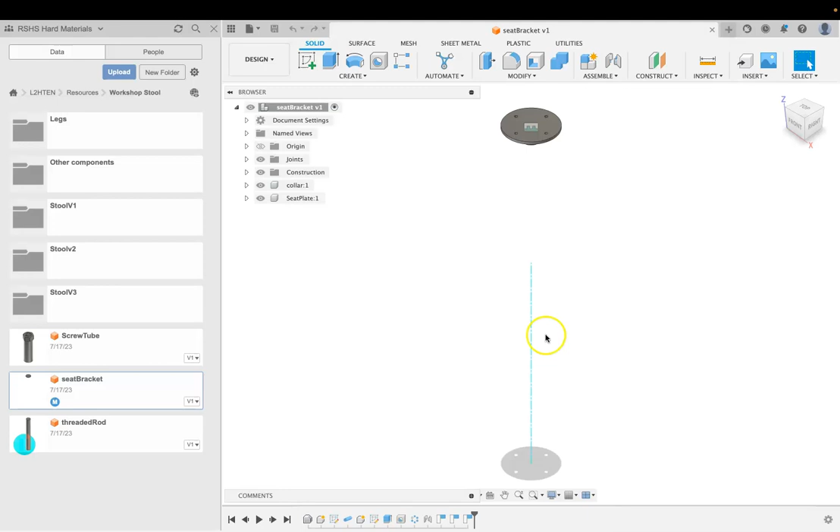We're going to be going about how to set up and prepare a file for our CNC plasma in order to cut out our seat plate. Our seat plate is all we need. So what I'm going to do is turn off the collar with the eye, turn off the construction, get rid of that line up there, and then home it so we can see.

So at the moment we're in our design workspace. We're going to be moving to our manufacture workspace. Now the first thing that I want to overview is what we want to happen after manufacture. What we start with is a square piece of steel, and we need to cut this round out of it. We're not going to be cutting these circles.

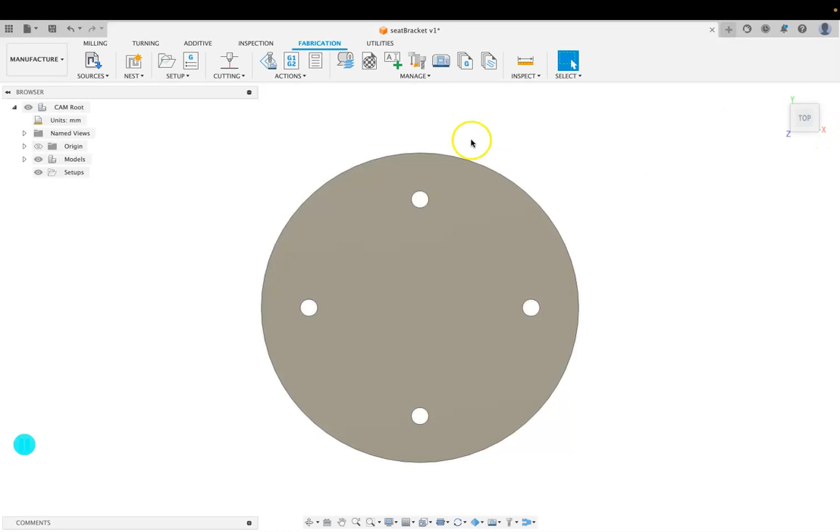Cutting small circles on the plasma cutter doesn't give a great finish, so we're going to be drilling those using a pedestal drill, and we're going to do that manually. So all we're doing is setting up to cut out this circle. What we have to do first is look up here. We've got different tabs, and the tab that we're concerned with for the plasma cutter is this fabrication tab here.

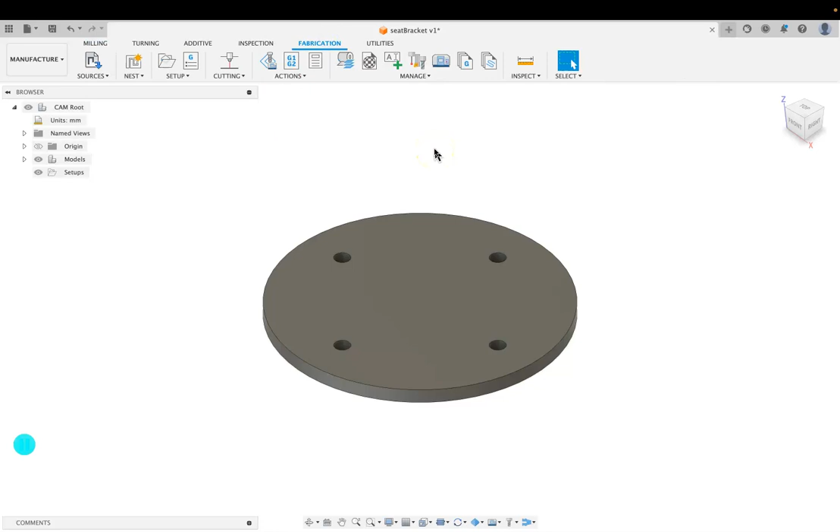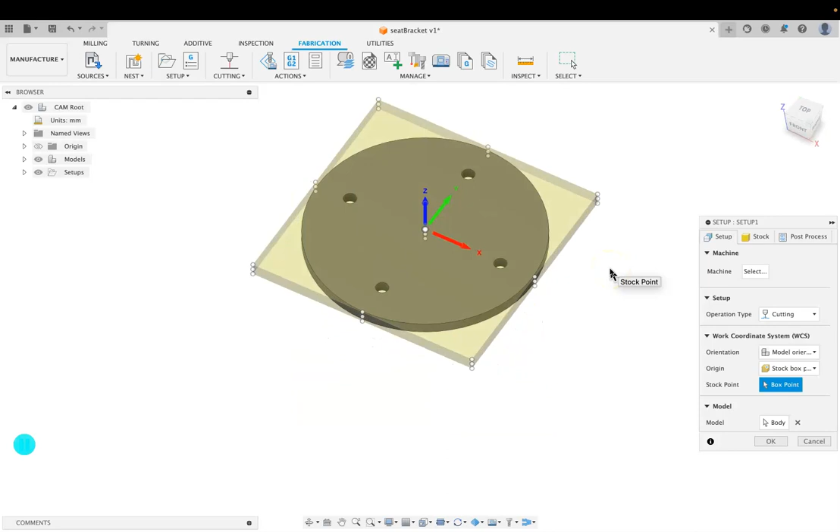The first thing that we need to do is set up what we're going to be doing. This little light color here is representative of the square piece of steel that we're going to be cutting the circular plate out of. You can see in the middle there's our X, Y, and Z axes, and they correspond to our view cube in here.

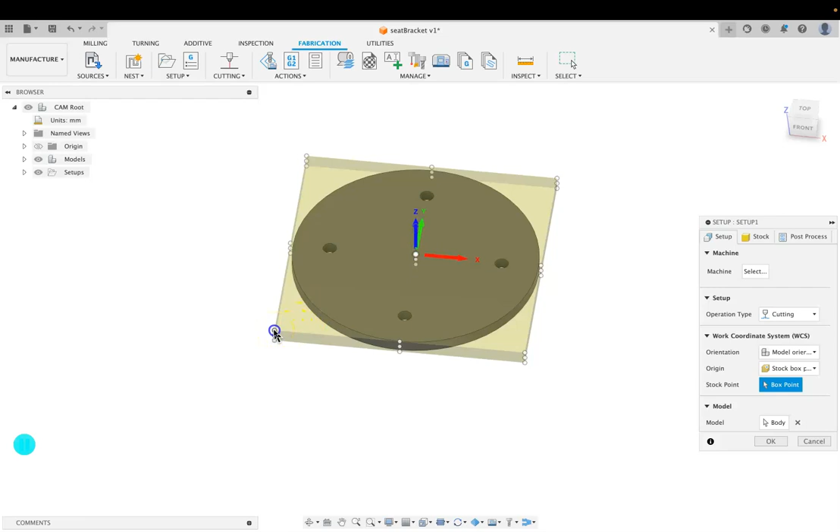Typically when we are doing a setup, we want to make sure that our zero is in this bottom left hand corner and on the top. This defines our starting point, and this is important for when we're actually on the CNC plasma. The stock is this material out here, this square. This tab up here is where we access this.

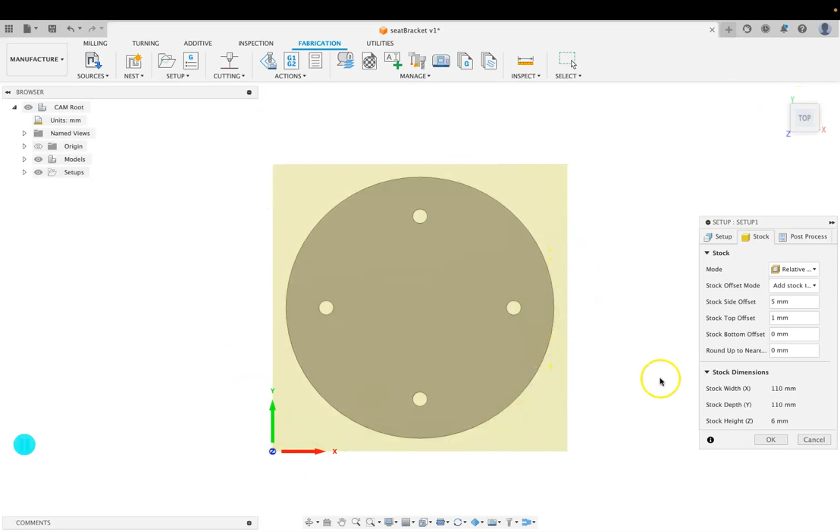Now the side offset defines how much extra material from our circle that we have. For example, if I put 5 mil, you can see that it has grown 5 mil on all sides. Top offset is the same, but it adds material on the top. For us, we want it to be 0 because we've already set the material that we need. And then we go OK. So this here is our setup finished.

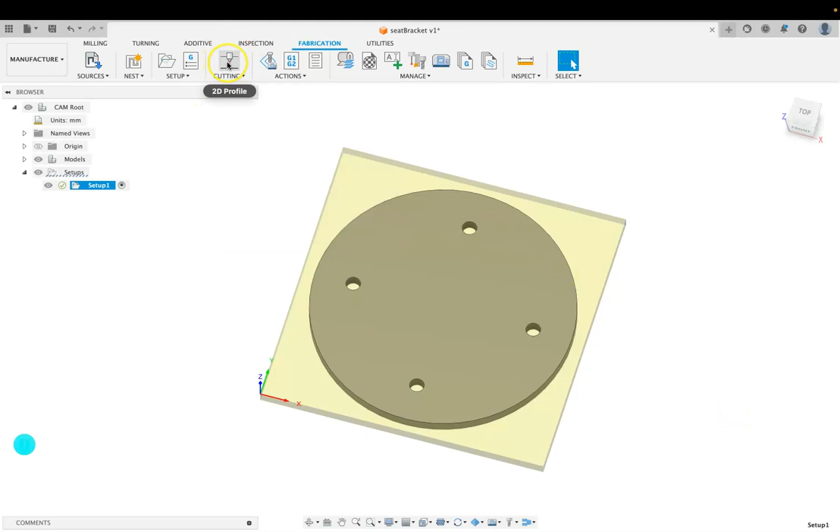Now what we need to do is define where we want to cut. We do that by going up to this tool over here, called a 2D profile. A plasma cutter only cuts in 2 dimensions. First, in this window, we want to select our tool. We've got our tool menu up, and in our cloud option we want to select the plasma cutter, and these are some preset tools with settings already attached to them.

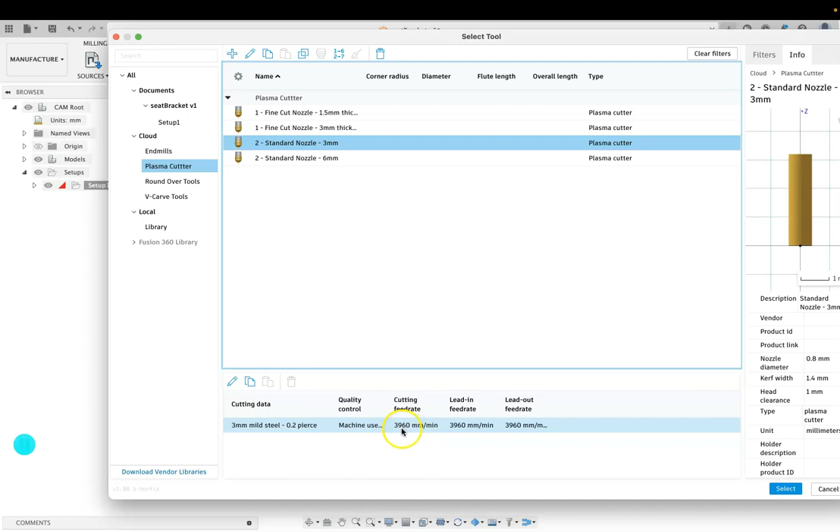In here we're going to be using 3mm steel. So we select the standard nozzle 3mm, and you can see here we've got our speed settings. It's our feed rate, and we've got our pierce time. This is how long the plasma cutter turns on to pierce through 3 mils worth of steel. It's 0.2 seconds, and it's important that we remember that for later. Once we've selected that, we go select.

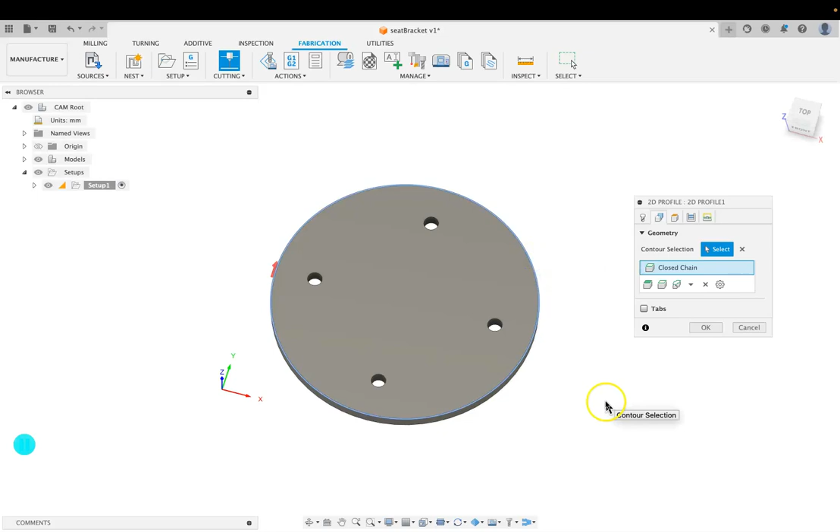Then we just move through these tabs. The geometry tab defines the contour that we're cutting, so we just select that top edge. If we have a look, you will see this red arrow here, which states that it's going to be traveling in this direction on the outside of this line. If I select that red arrow, you can see it's changed to the inside of the line, and we don't want that; we want it to cut on the outside of the line. So on the left hand side of the line and going in this direction is the correct way.

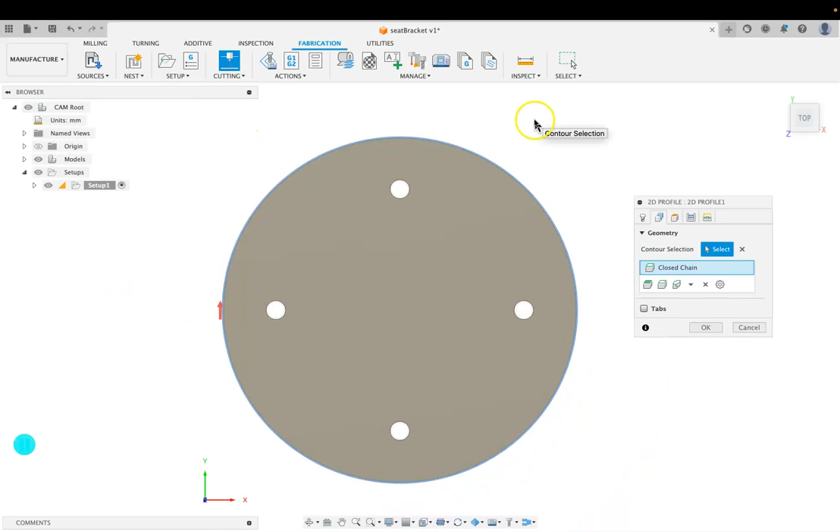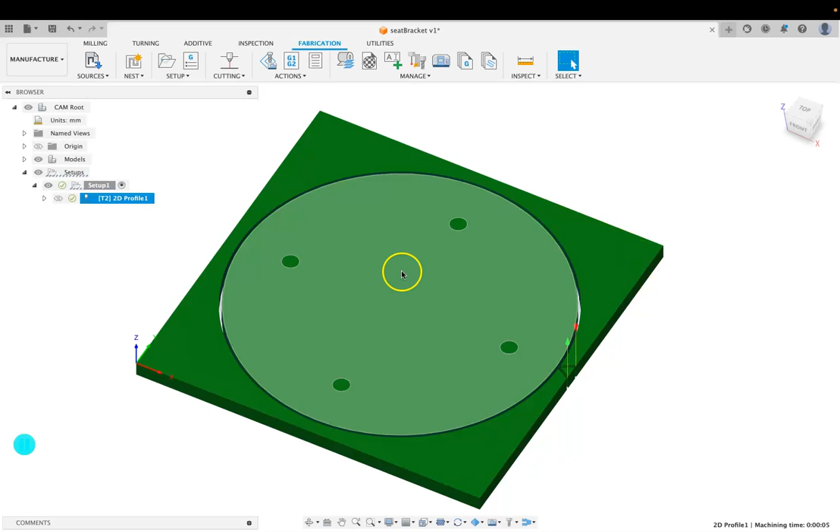We don't need to worry about heights, so we're going to skip that tab, but we want to look at passes. Before we do that, I'm just going to go OK so we can have a look at what that looks like. This green area here, that's our stock. This circular bit is the plate that we're cutting out.

This line here is where the plasma cutter starts. It comes in and around, and then it comes out here. It does that because it needs to blow through this material, and if it's any closer it may affect our part. So we want the plasma cutter to blow through the material away from our part so it doesn't get damaged.

So that's our starting point. Once we've done that and we want to make more changes, we go over here, put our mouse over the little icon, double click it, and then go to passes.

What we want to focus on here is our finishing overlap. What a finishing overlap does is it designates how far our plasma cutter cuts past where we first started.

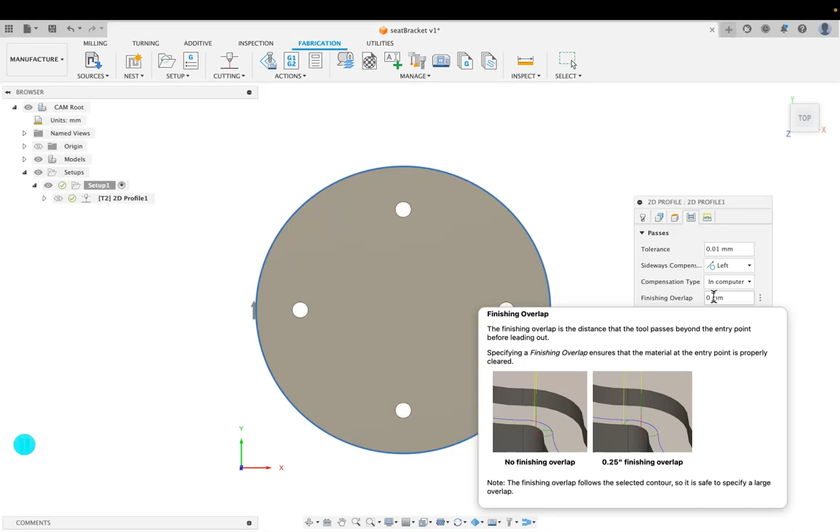For example, I'm going to put in 3 mil here and press OK. We can see here that this is our finishing point. When we looked at it earlier, it finished here, so it's actually traveling past where we started 3 mil and then exiting. The reason we do that is so we get a nice finish in this join, because otherwise we might get a little out bit in here, which would then have to be ground off.

So go back into our settings again. We've got our 3 mil. We don't want to leave any stock.

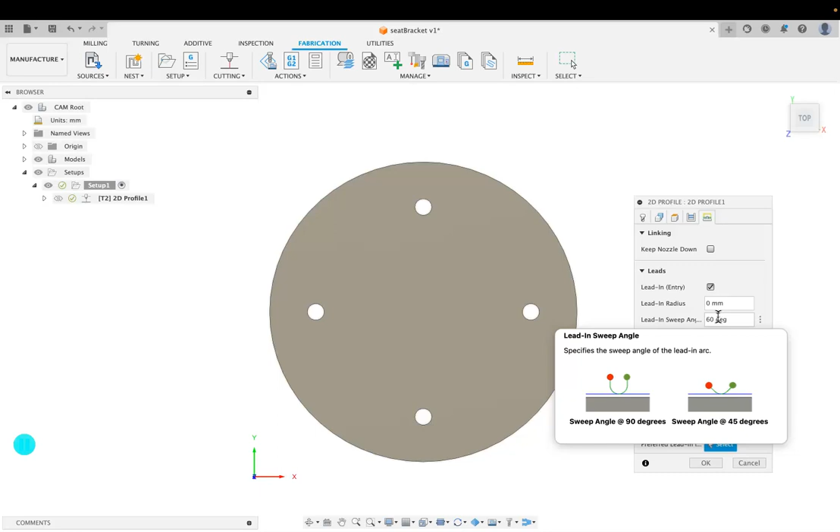This here is our lead in and lead out. If we hover over that, it designates the angle in which we approach our part. When we press OK, this angle here is our 60-degree lead in. It's a nice lead in, and you don't have too much of a rough edge to the approach of the edge of the part. It comes around and then it leaves as well on a 60-degree angle.

So we're going to keep those settings. There are certain circumstances where you might want to change it.

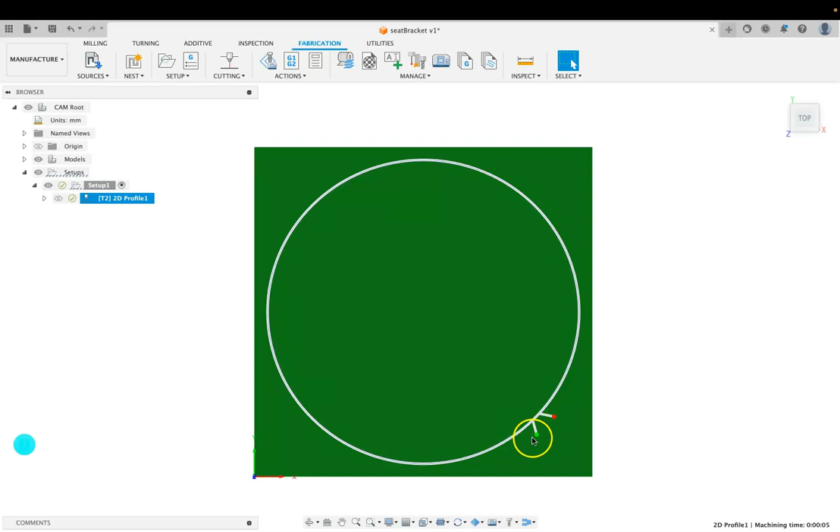Piercing clearance, we need 1.4. And this here, the preferred lead-in - what I'm going to do is select a corner and go OK, and that changes the position of where we're at. I do that because there's more material in there, and if we're dealing with this rectangle, it means there's more place to pierce. So there might be certain situations where you want to place your piercing point or your start point.

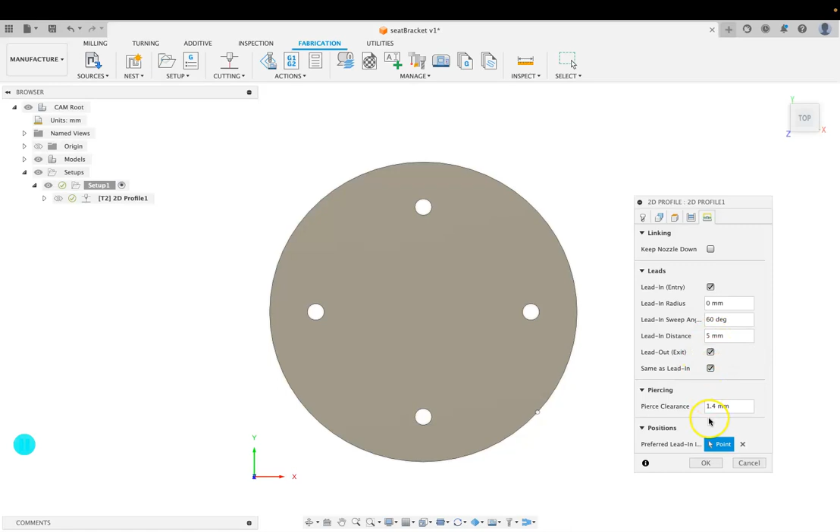And there we are, good to go. Go OK. Right.

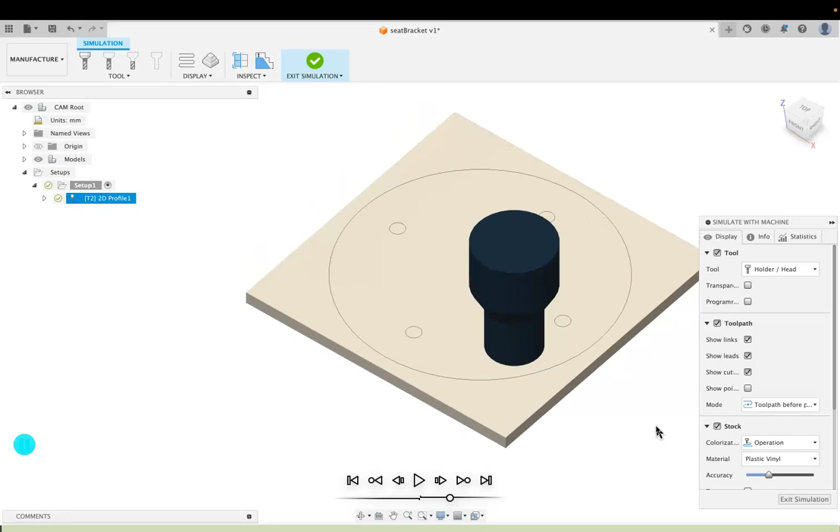So what we want to do from here is simulate, and a simulation allows us to pick up any errors that we might not have determined in setting up the toolpath. So what we can do is press play, and it will show us how the machine is cutting.

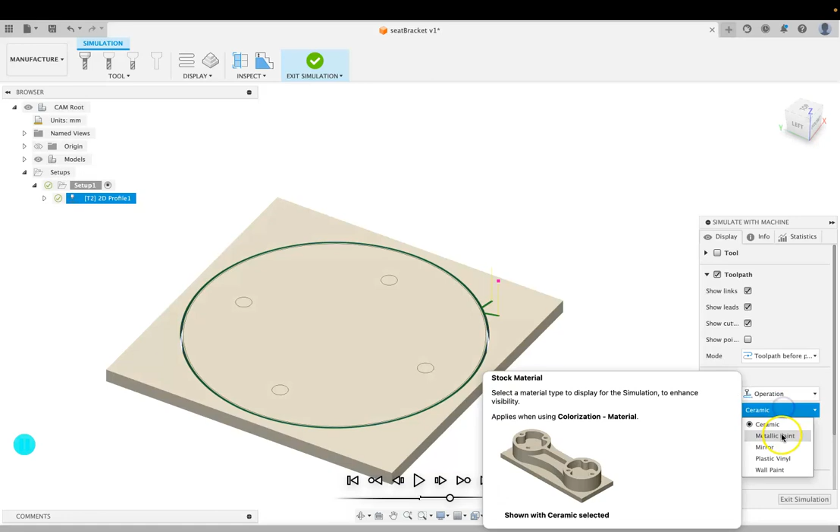And I can turn the tool off so you can have a look. See, it goes past 3 mil and then out. You can turn your stock on and play with your different types of materials, and it will give you different looks.

Once you're happy with the simulation and it's cutting out the material that you need, what we need to do is post-process it. So we go up to this tool here next to the simulation, and it says post-process. We want to click on that.

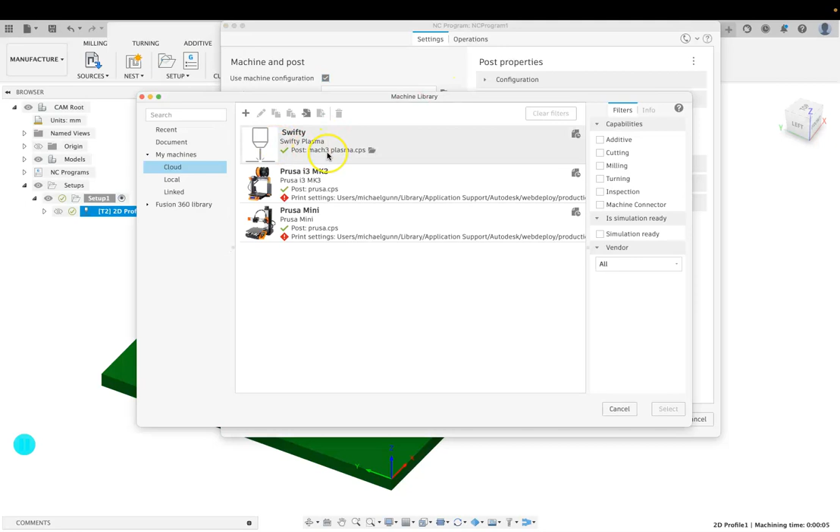In here, we want to use our machine configuration. We want to click on the Swifty Plasma, select, and then it will bring up our post processor.

If you're not using machine configuration, what you need to do is choose from library, and in search, look for Mach3 and then the Plasma, and select that.

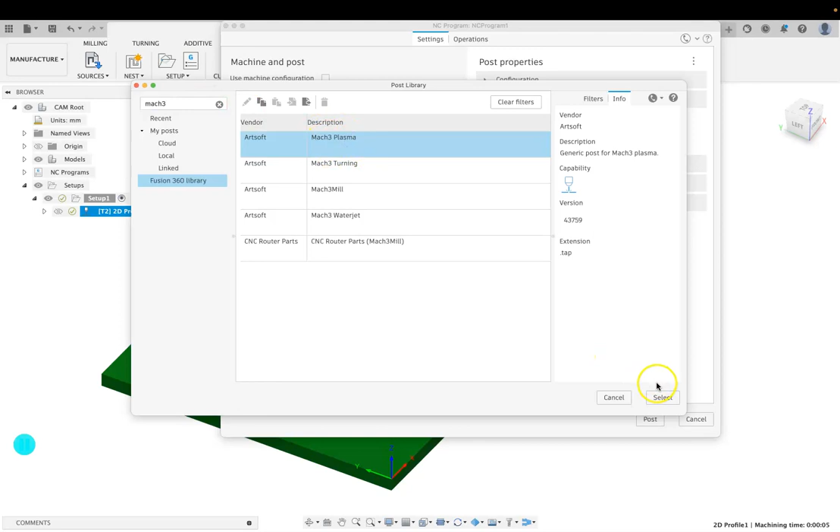And then what we need to do is give it a file name. So 1001 is great - it allows you to be able to define 1, 2, 3, 4, depending if you have multiple files. Comment, and then I'm just going to put Mike G for my name.

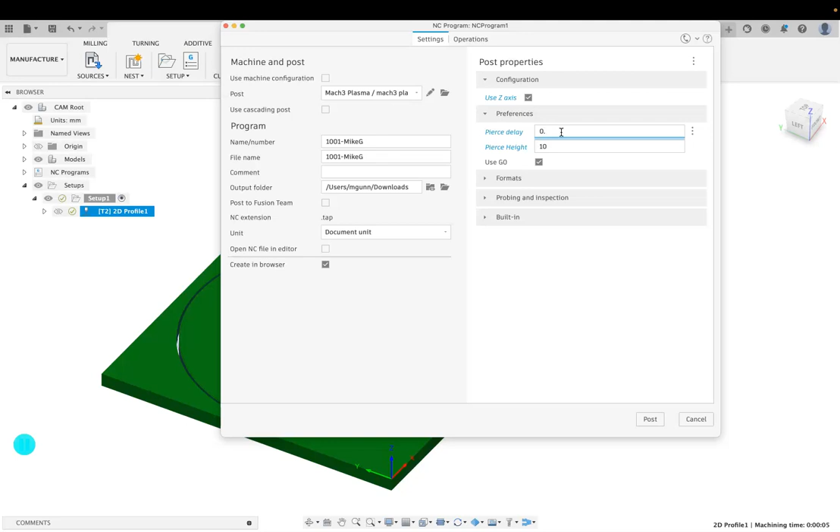Over on the right hand side, under configuration, you want to use the Z-axis. Now pierce delay is 0.2, and that was defined in the name of our tool. I'll just show you where it is - if we go into the tool, we go into plasma cutter, 3mm, 0.2 pierce.

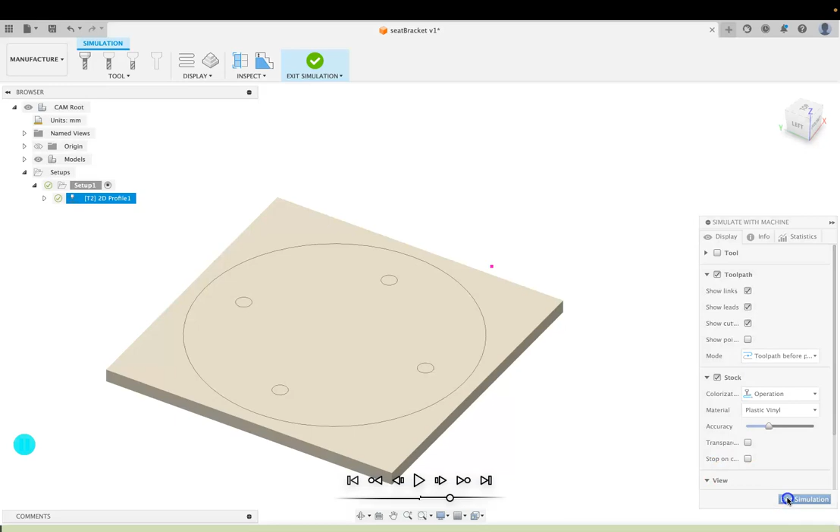So now I just have to go back to doing this - Mike G, 0.2, make sure the Z-axis is selected, pierce height we're going to use 10, built-in we want to make that 1000, and then we need to choose an output folder, and I'm going to choose the desktop.

We need to check our operations, make sure the 2D profile is selected. Sometimes if we have more, we might need to select more, but in this case it's just the one.

So we've selected our post, we've named it correctly, 1001 with your name on it. We've used the Z-axis, pierce height at 10, 0.2 pierce delay for this material, which is 3mm, but if you're using a different material, then it would be a different delay. You've chosen your output folder, and you have also changed your high feed rate.

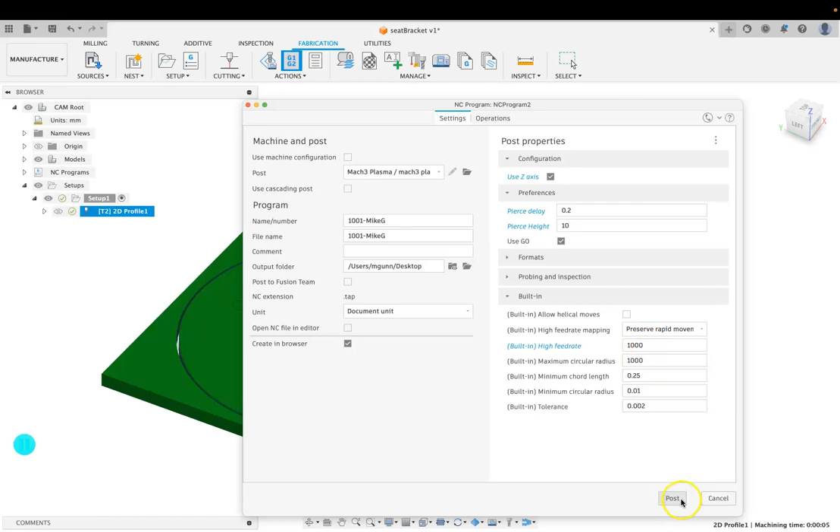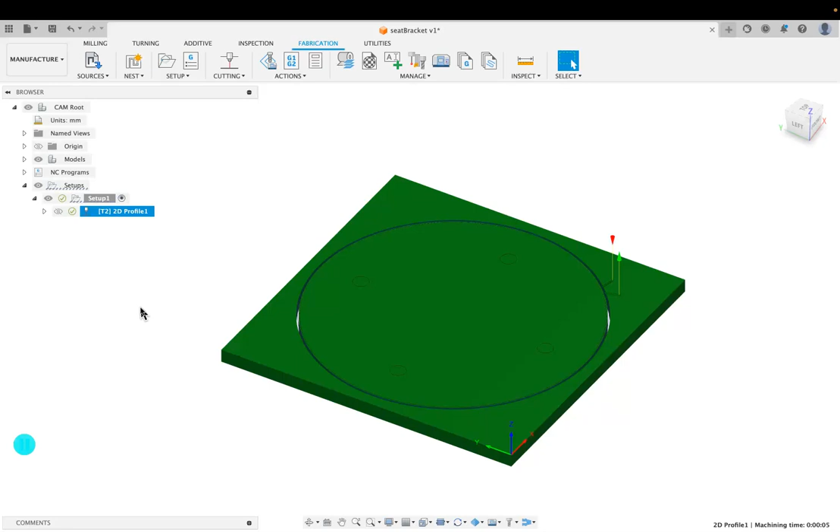So once you've done that, we go post, and then that will be outputted to the location that you chose. Now, once we've done that, there's one more step before getting onto the plasma cutter, and that will be in our next video.